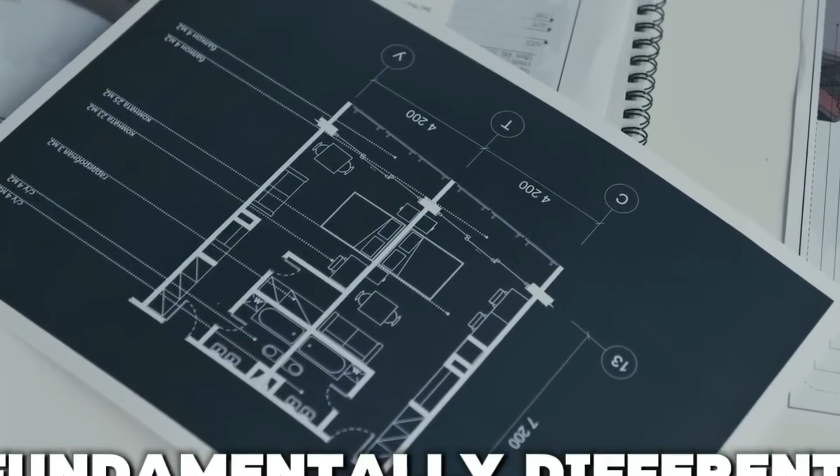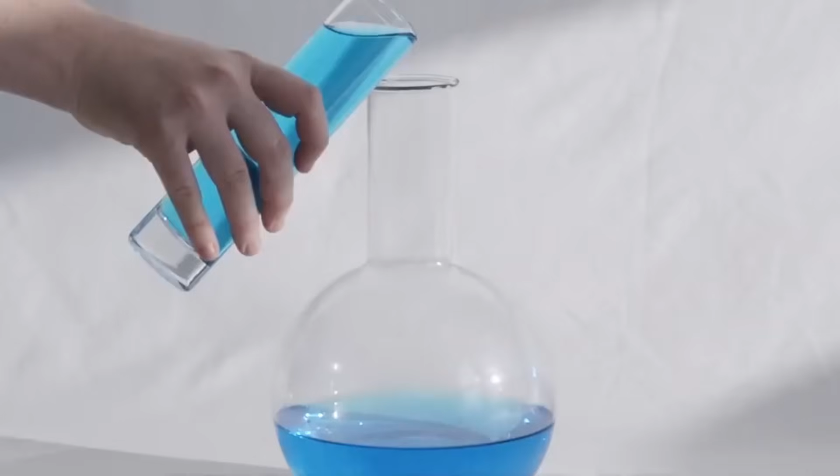It is not oil, it is not lithium, it is not uranium in the traditional sense. It is something so ordinary, so ancient, so completely unremarkable to the human eye that most people walk past it every single day without a second thought. It is sand. But not just any sand. A very specific kind of sand, combined with a very specific kind of nuclear fuel, inside a very specific kind of reactor that China has spent 4 decades and billions of dollars perfecting in secret.

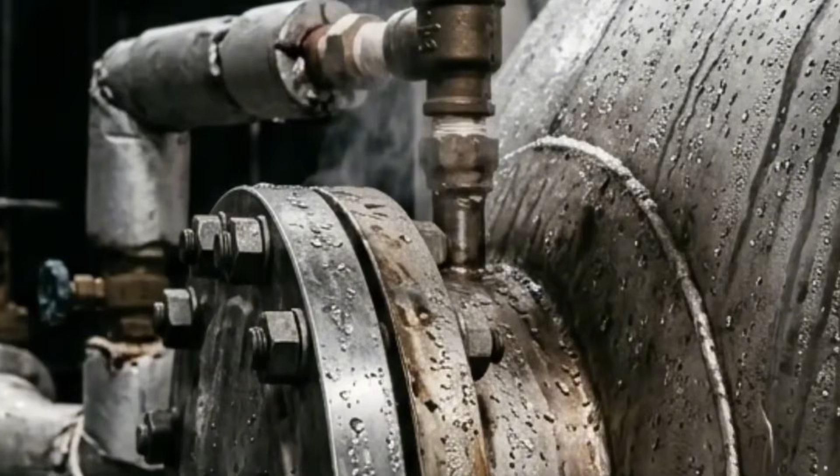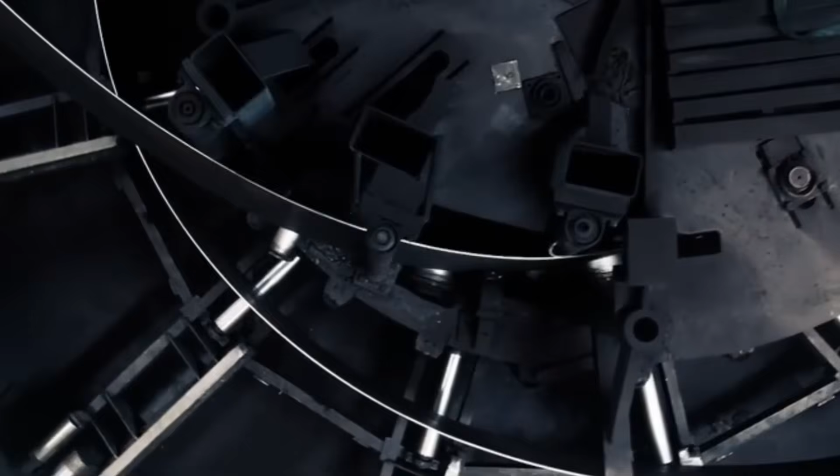And what they have now built in the Gobi Desert may be one of the most consequential engineering achievements of the last 100 years. To understand why that claim is not an exaggeration, you have to understand the scale of what is actually being proposed here. A single commercial-scale version of this reactor, according to the engineering projections published by the Chinese Academy of Sciences, could generate enough electricity to power a city of 1 million people continuously for 1,000 years.

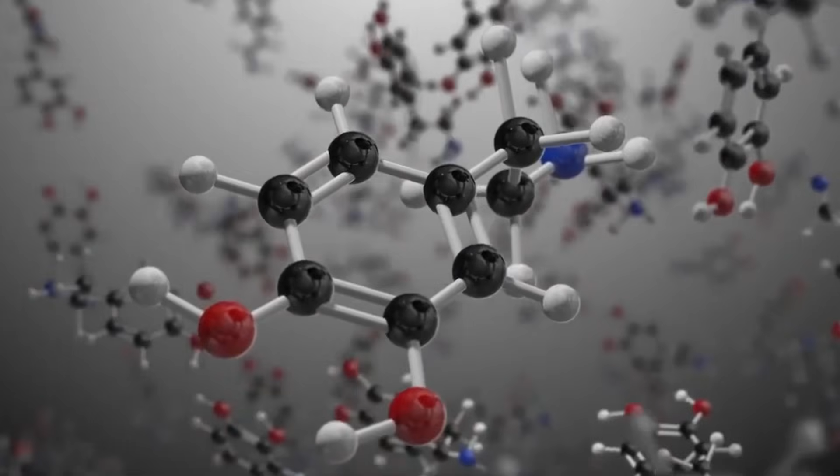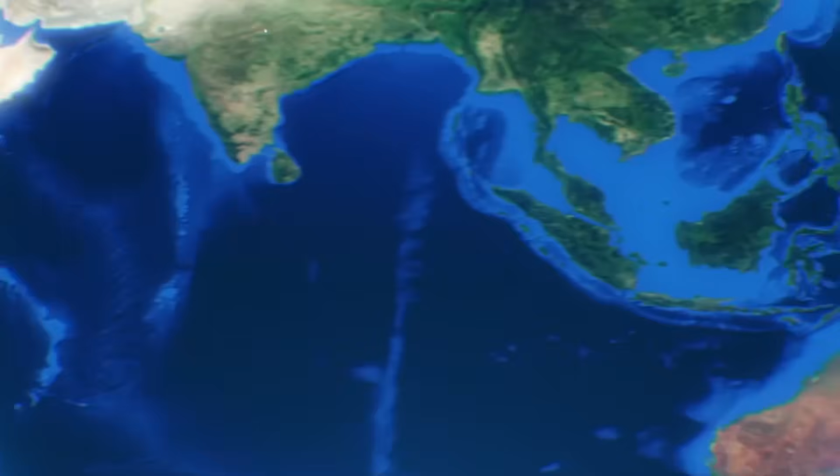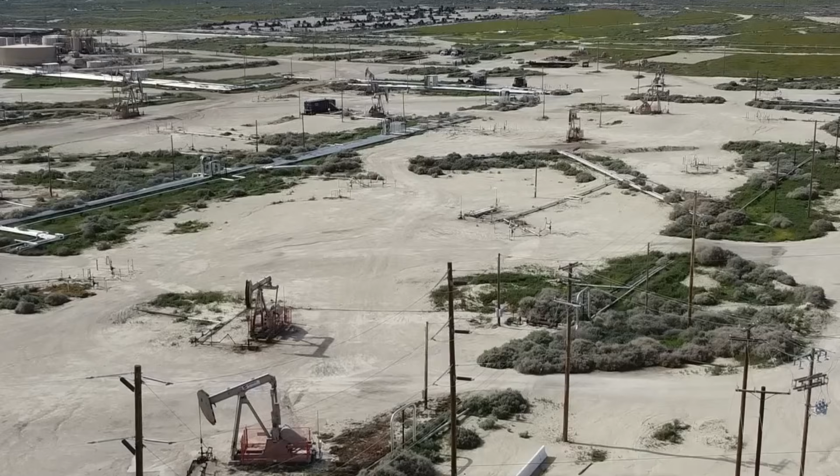Not 100 years, 1,000. With no carbon emissions, with no risk of the kind of catastrophic meltdown that destroyed public trust in nuclear power after Chernobyl and Fukushima, and using a fuel that is so abundant in China's western territories that geologists estimate the country is sitting on reserves sufficient to sustain human civilization at current energy consumption levels for 60,000 years. That number is not a typo.

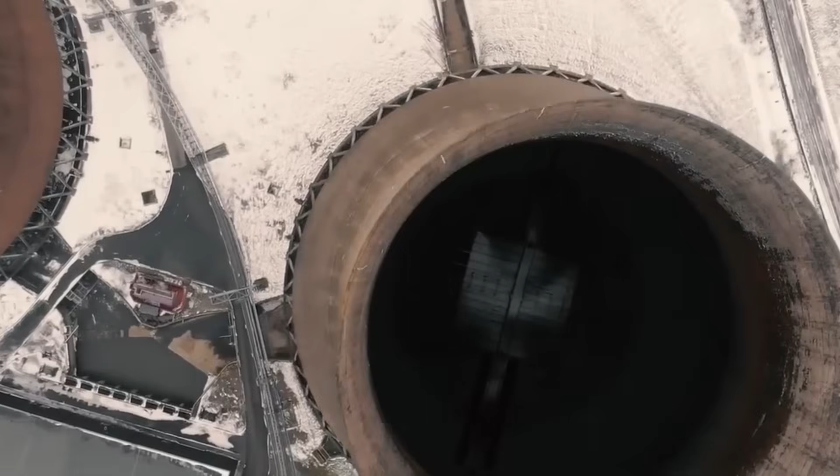The reactor is called the thorium molten salt reactor, and the substance that makes it work, the material that is now being called the fuel of the future, is thorium, a mildly radioactive element that was discovered in 1829, named after the Norse god of thunder, quietly ignored by the global nuclear industry for the better part of a century, and is now the centerpiece of what may be the most ambitious clean energy project in human history.

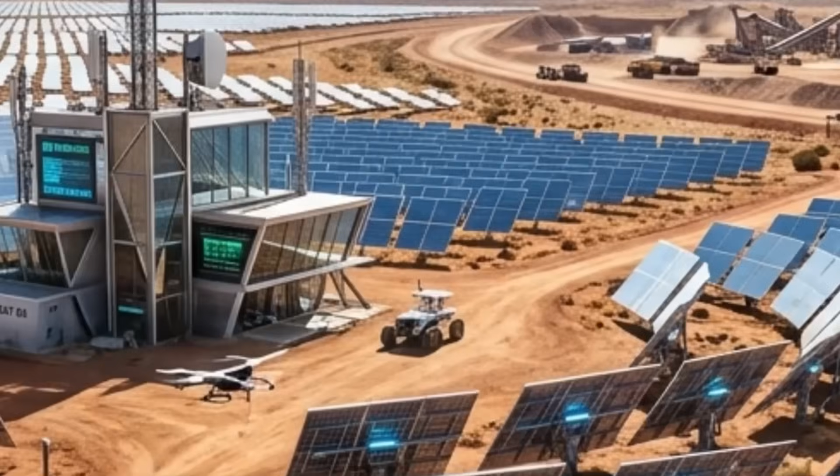Picture a landscape of almost total desolation. The Gobi Desert in the Gansu province of northwestern China, where temperatures swing from -30 degrees in winter to over 40 degrees in summer. Where the wind strips paint from metal and sand fills every seal and gap in equipment that engineers bring in from the outside. It is exactly the kind of place where you would not expect the future of human civilization to be quietly taking shape.

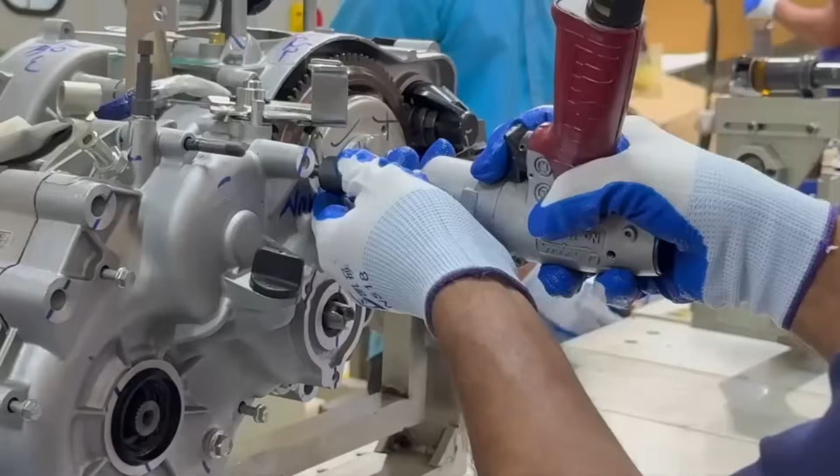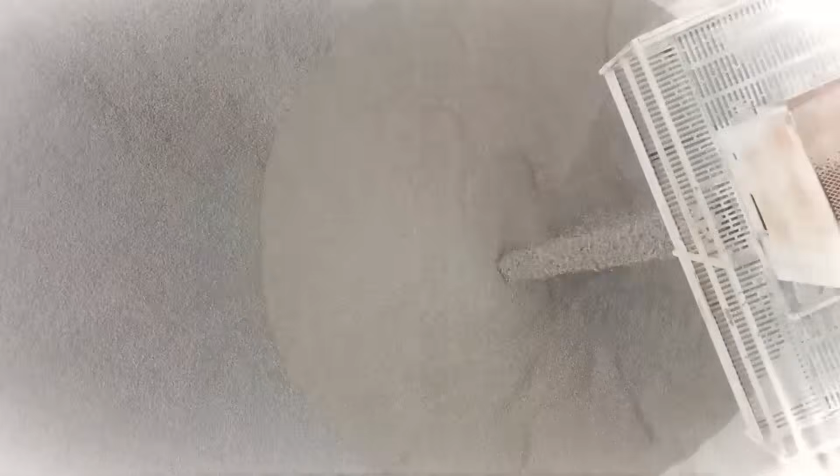But in September 2021, inside a nondescript facility operated by the Shanghai Institute of Applied Physics, a small team of Chinese scientists achieved something that nuclear engineers around the world had been trying and failing to achieve for more than 60 years. They started up the world's first operational thorium molten salt reactor. It ran. It produced heat. It proved the concept. And when the news reached the international scientific community, the response was not celebration. It was shock. Because almost nobody in the West had believed China was that close.

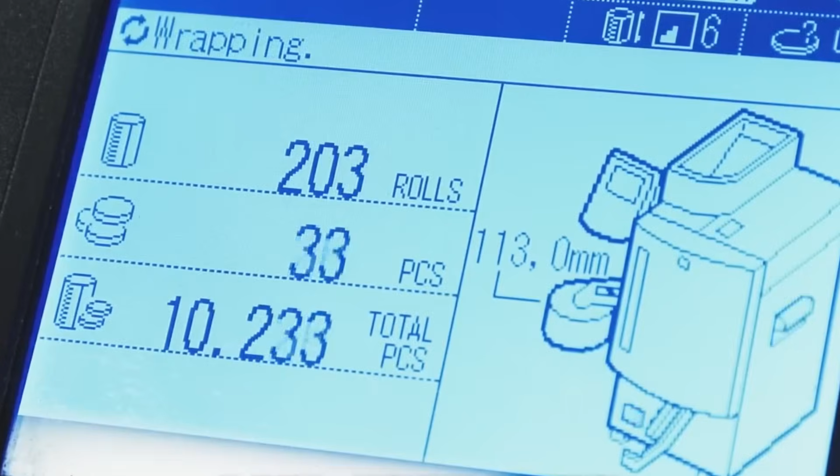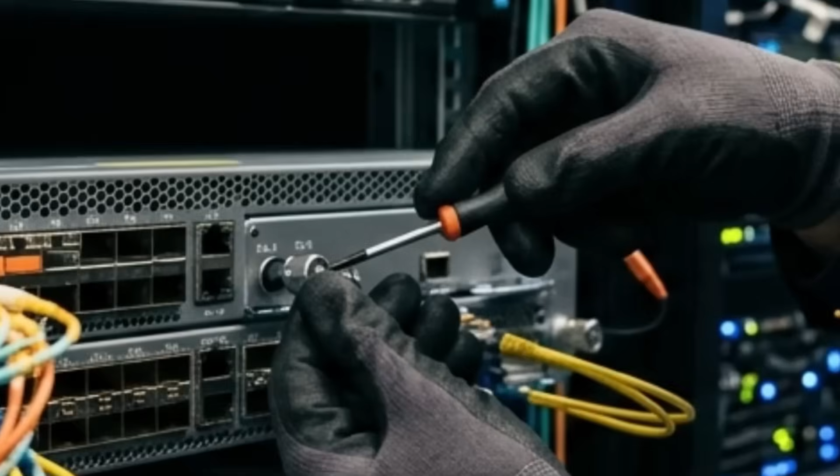The story of why thorium was abandoned in the first place is one of the most consequential decisions ever made in the history of energy policy. And it was not a decision made on scientific grounds. It was a decision made on military grounds. In the 1950s, when the United States was racing to build a nuclear arsenal, the government needed a specific material to manufacture nuclear weapons: plutonium. And plutonium comes from uranium reactors.

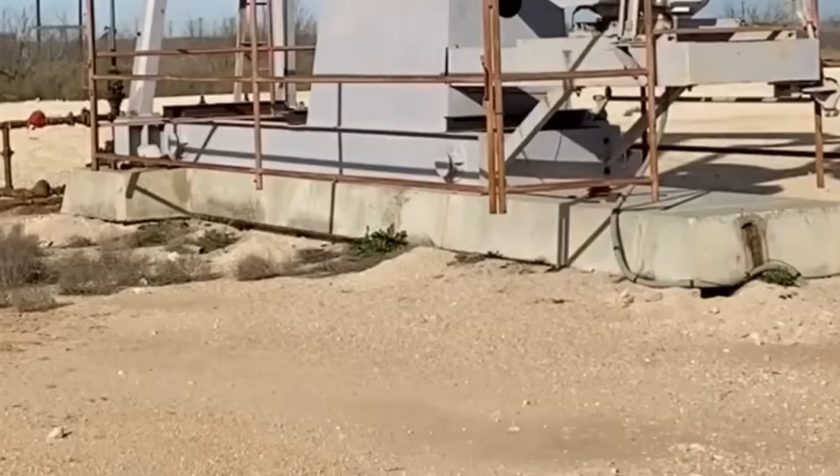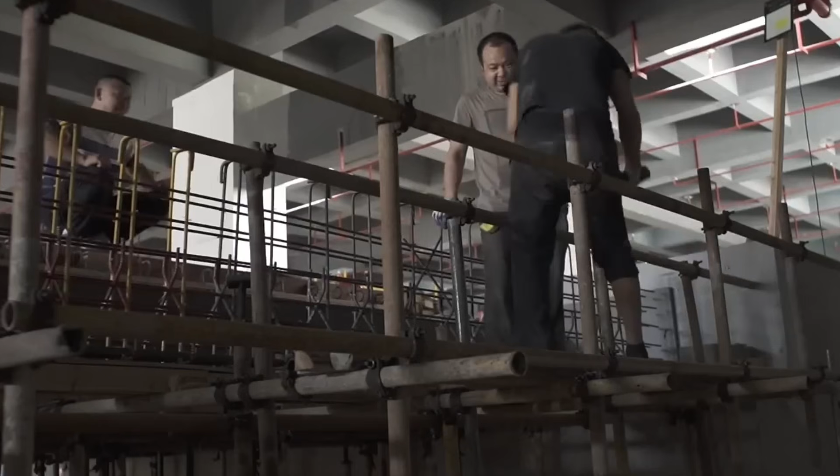Thorium reactors, by contrast, do not naturally produce plutonium in usable quantities. They produce uranium-233, which is theoretically weapons-capable but extraordinarily difficult to weaponize in practice. So when the Atomic Energy Commission sat down in the 1950s and 1960s to decide which reactor technology to back with federal funding and political support, the choice was not made by asking which technology would be safest, or cleanest, or most efficient. The choice was made by asking which technology would be most useful for producing nuclear weapons material. Uranium won. Thorium was sidelined.

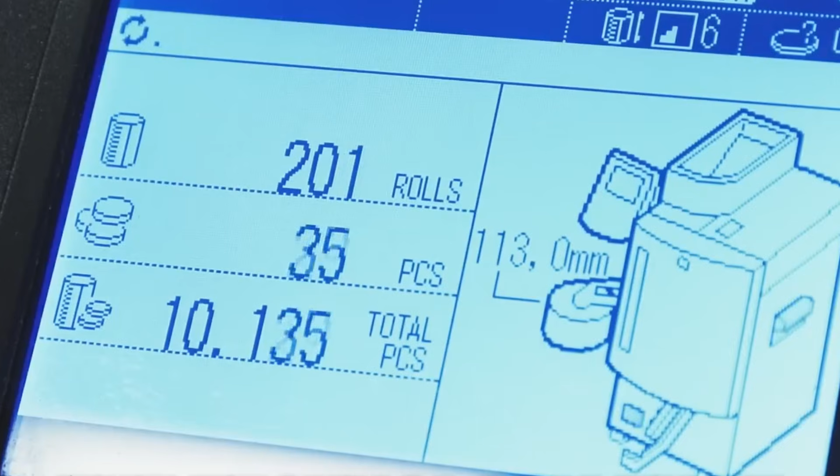And the entire global nuclear industry was built around uranium-fueled light water reactors for reasons that had nothing to do with whether they were the best technology for generating electricity. This is where things become interesting, because the engineers who championed thorium in those early years were not wrong about the physics. They were simply outmaneuvered by the political realities of the Cold War.

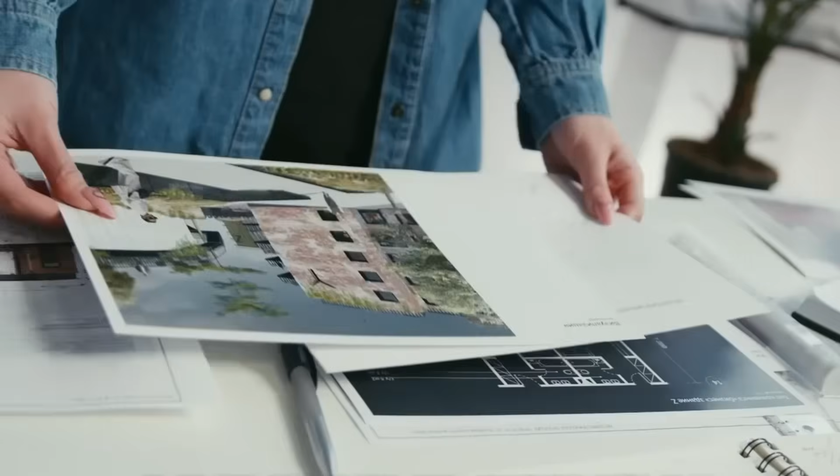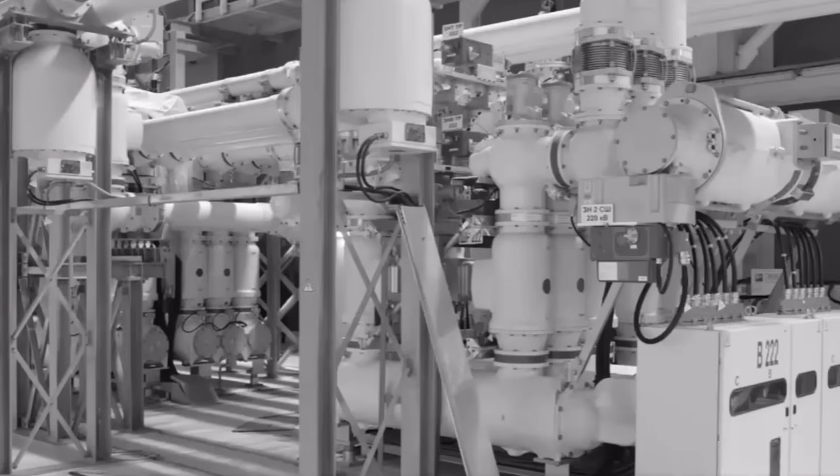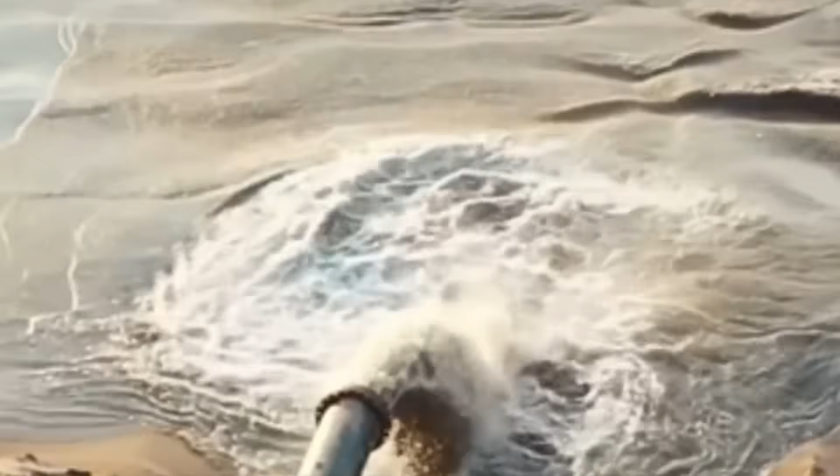And the physics of thorium is genuinely extraordinary. A thorium molten salt reactor operates on a fundamentally different principle than anything most people think of when they hear the word nuclear. There is no solid fuel rod. There is no pressurized water coolant. There is no risk of the kind of steam explosion or hydrogen fire that caused the disasters at Chernobyl and Fukushima. Instead, the thorium and the coolant are dissolved together into a liquid salt mixture, operating at atmospheric pressure inside a sealed system that has an almost miraculous safety property built into the physics itself.

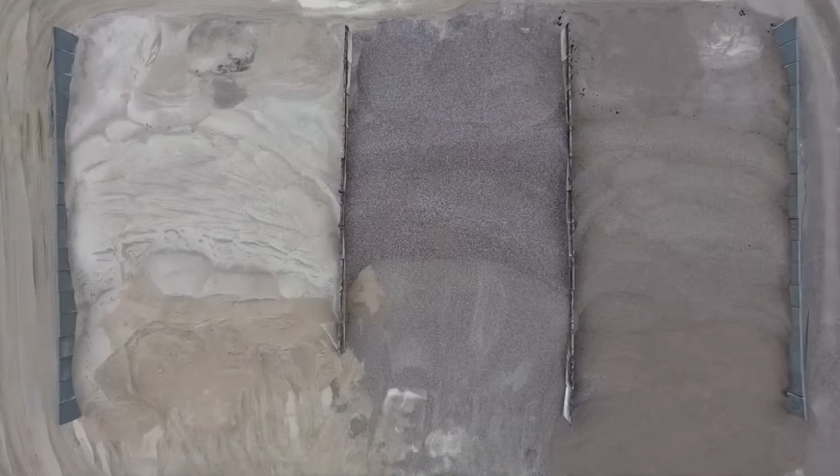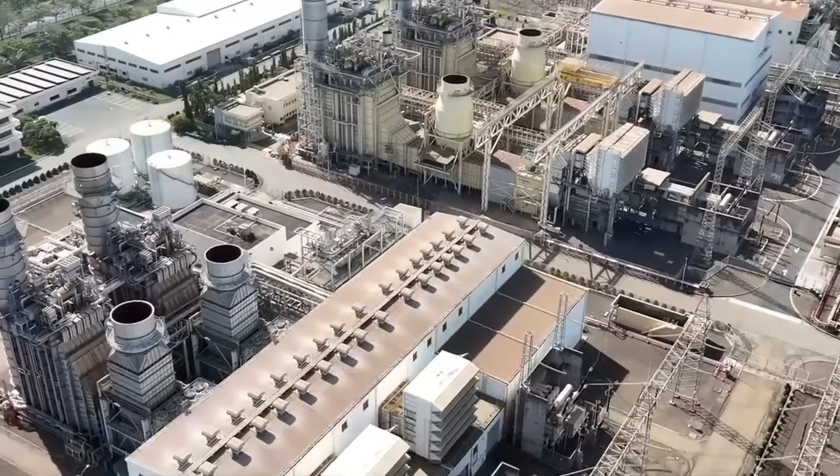If the reactor gets too hot, the liquid salt expands, the nuclear reaction slows down, and the system cools itself. No operator intervention required. No emergency cooling systems. No backup generators that need to keep running. The reactor is, in the language of nuclear engineers, walk-away safe. You can turn off every pump, evacuate every operator, and the reactor will shut itself down without releasing a single radioactive particle into the environment.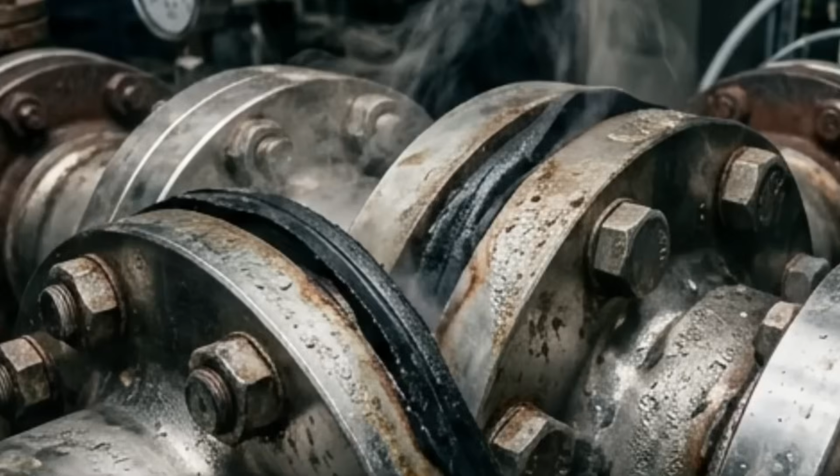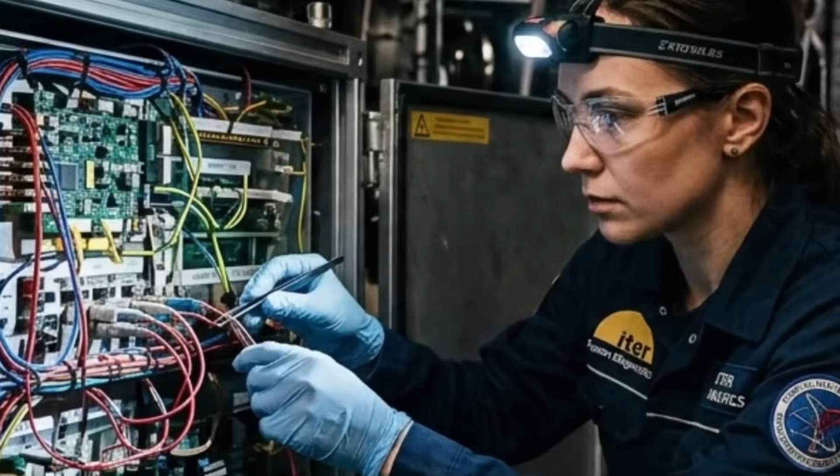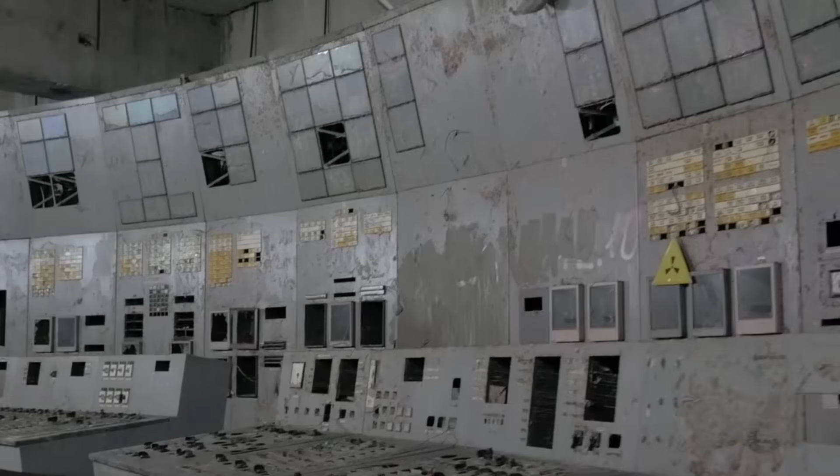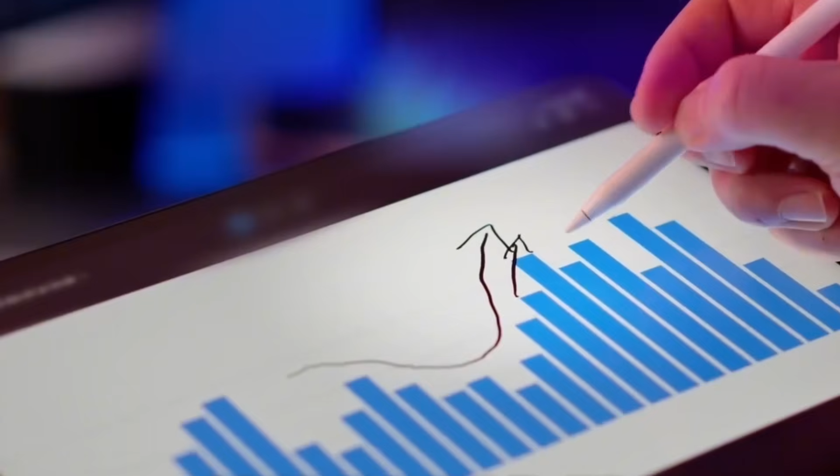But the safety properties are only the beginning. What makes thorium molten salt reactors genuinely different from anything the world has ever built before is the fuel cycle itself. A conventional uranium reactor is astonishingly inefficient. It uses roughly 3 to 5% of the potential energy contained in the uranium fuel before the fuel becomes too degraded to sustain a reaction and has to be removed and stored as high-level radioactive waste. The rest of that energy, 95 to 97% of the potential locked inside the uranium, is simply left behind. Locked inside radioactive material that will remain dangerous for tens of thousands of years.

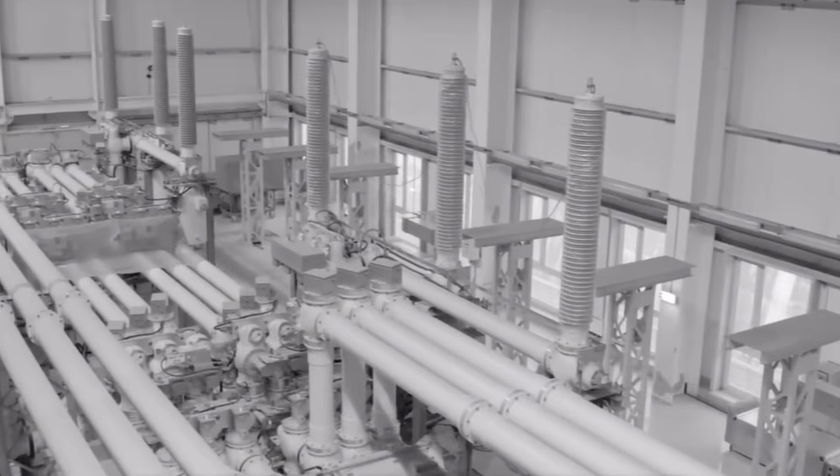A thorium molten salt reactor, by contrast, can consume virtually all of the available energy in its fuel. Estimates from the International Atomic Energy Agency suggest that thorium reactors could be 60 to 90 times more fuel efficient than conventional uranium reactors. That is not a marginal improvement. That is a fundamental transformation of what nuclear energy is capable of delivering.

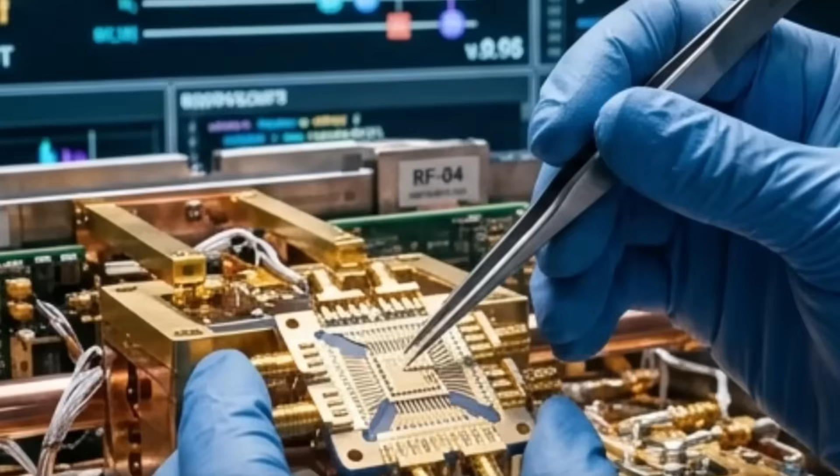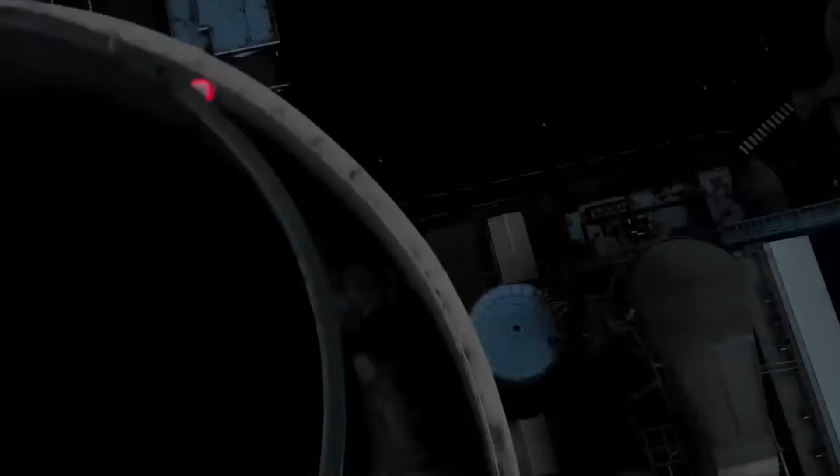And then there is the waste question. This is the issue that has haunted nuclear power since the beginning. Where do you put the radioactive material when you are done? Conventional nuclear waste remains dangerous for between 10,000 and 100,000 years, depending on the isotope composition. Entire countries have spent decades and billions of dollars trying to build geological repositories deep underground, where they can isolate the waste from the biosphere for time periods longer than human civilization has existed.

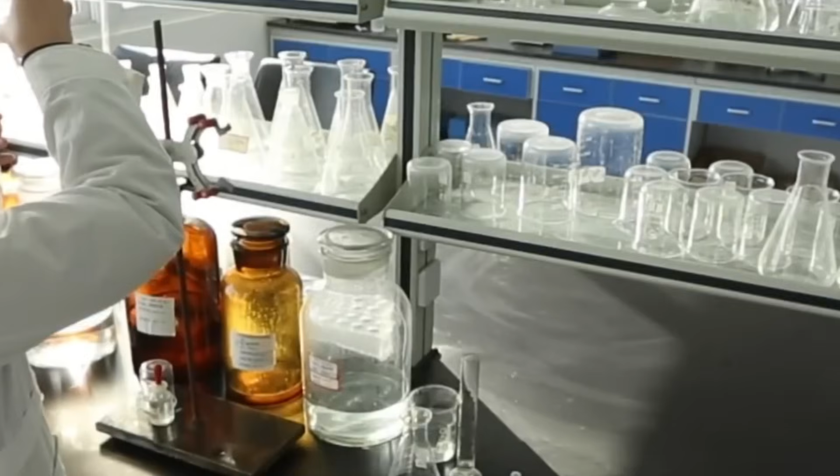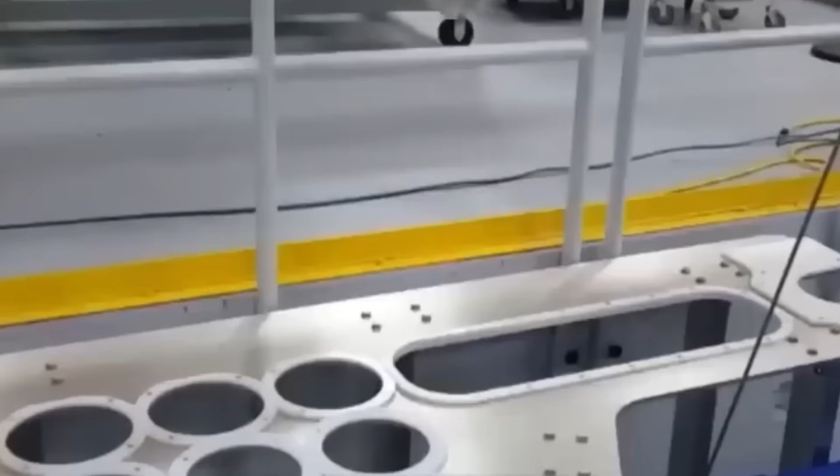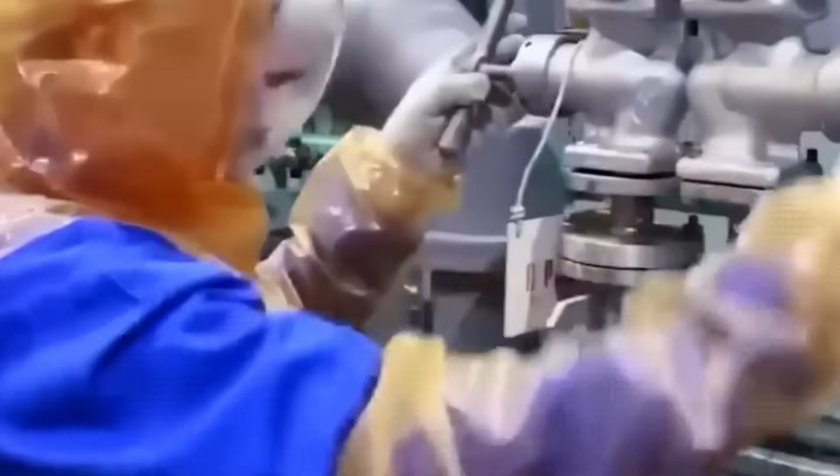Finland is building one. Sweden has one in progress. The United States spent 30 years and over $15 billion trying to build one at Yucca Mountain in Nevada before the project was canceled for political reasons. The waste problem is not solved. It is deferred. Thorium molten salt reactors produce waste that remains dangerous for roughly 300 years. Not 10,000 years. Not 100,000 years. 300 years. Which is a time frame that human institutions can actually plan for, fund, and manage.

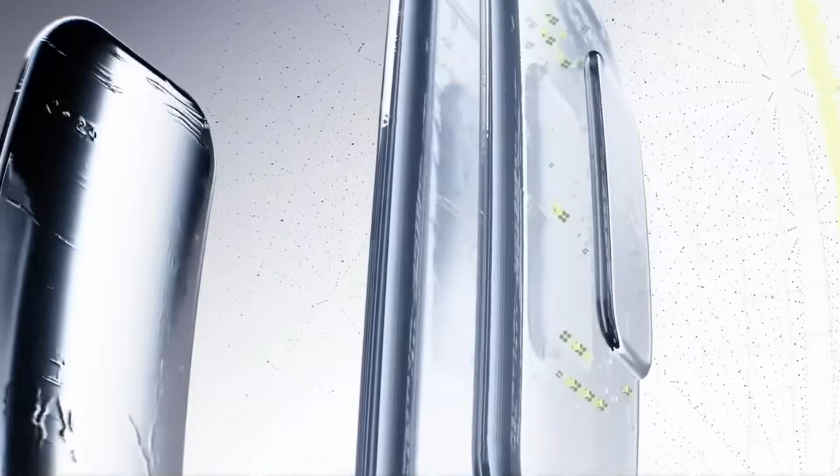For decades after thorium was sidelined in the 1950s and 60s, the concept existed mostly in academic papers and the arguments of a small group of nuclear engineers who believed the world had taken the wrong fork in the road. The most famous of these was Alvin Weinberg, the director of Oak Ridge National Laboratory in Tennessee, who ran a working molten salt reactor at Oak Ridge from 1965 to 1969. The reactor worked. It demonstrated the physics. It produced continuous power for more than 13,000 hours of operation.

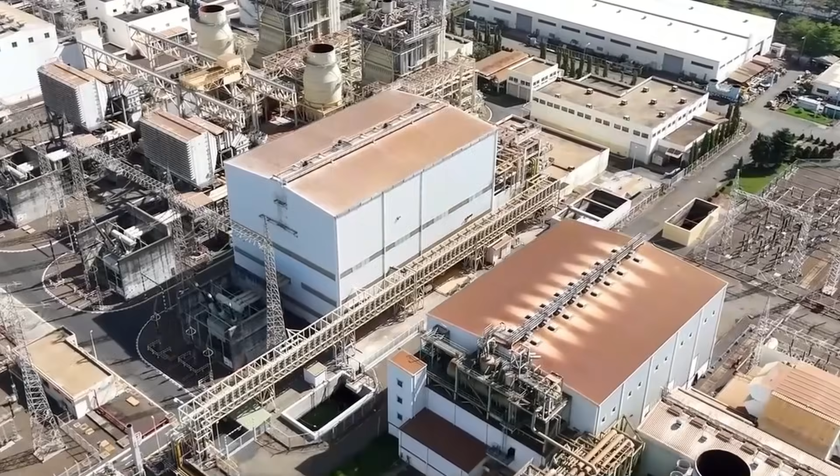And then the Atomic Energy Commission shut it down, defunded further research, and Weinberg himself was eventually fired, in part because he would not stop arguing that molten salt reactors were the safer and more rational choice for civilian nuclear power. The decision to shut down the Oak Ridge program is one of those moments in technological history where you can trace a clear line between a policy choice and a consequence that rippled forward for decades. What changed was China.

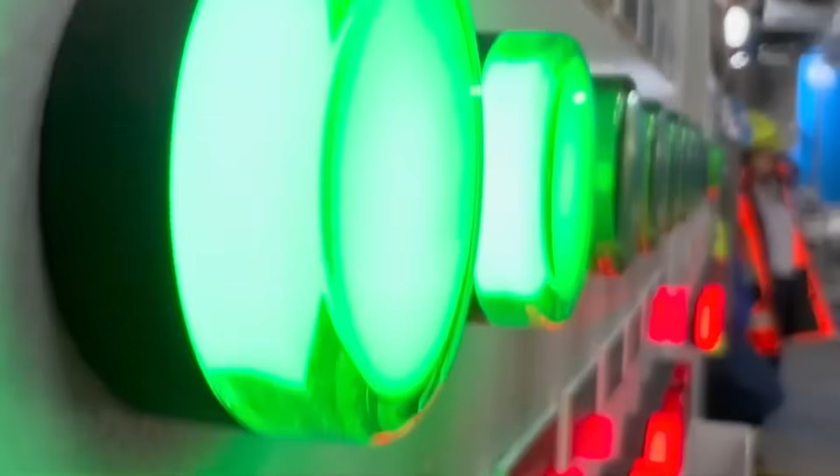In 2011, the same year that the Fukushima disaster in Japan triggered a global wave of reactor shutdowns and public fear about nuclear power, the Chinese Academy of Sciences made a decision that went almost completely unnoticed in the Western press. They launched a formal national research program to develop thorium molten salt reactor technology, with a budget that would eventually exceed $3 billion, involving more than 700 scientists and engineers across multiple institutions. The timing was not coincidental.

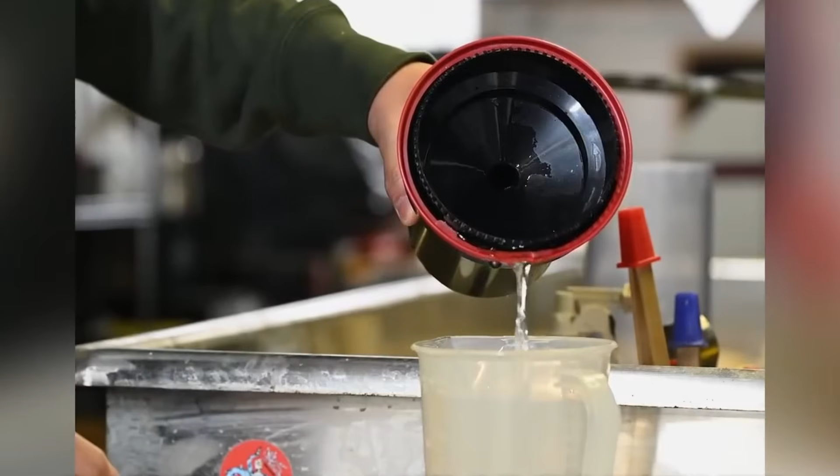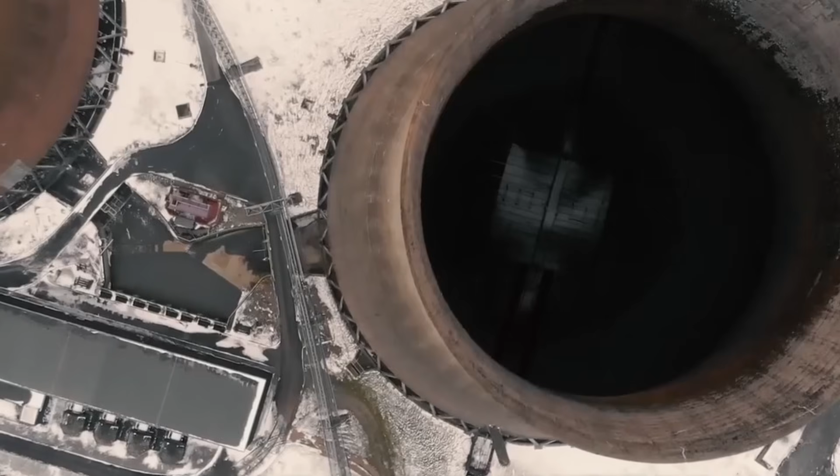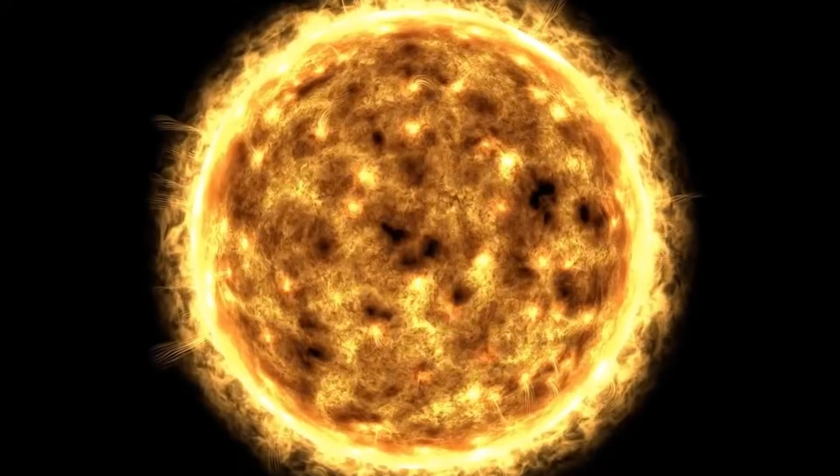Chinese energy planners looked at the Fukushima disaster and drew the opposite conclusion from most of the world. Instead of retreating from nuclear power, they concluded that the problem was not nuclear power itself. The problem was the specific reactor design that had been inherited from Cold War military priorities. They looked at molten salt reactors, looked at the physics, looked at the safety profile, and decided this was worth a serious national effort.

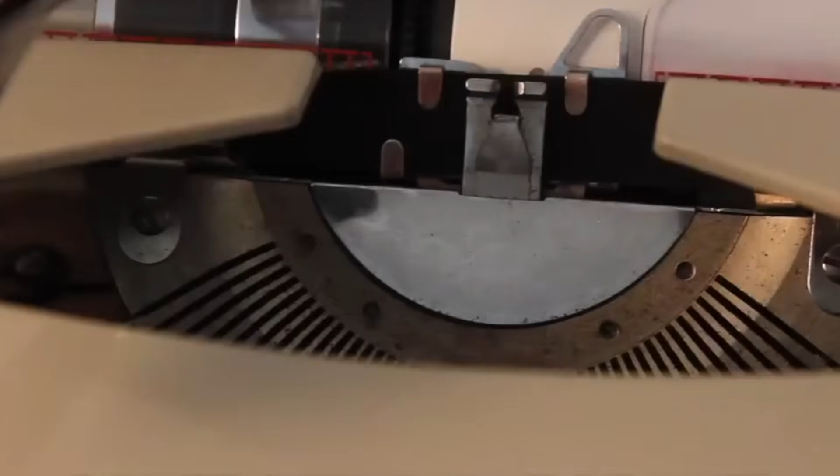The scale of what China built over the following decade is difficult to fully appreciate without seeing the facility plans. The Shanghai Institute of Applied Physics, which led the program, expanded from a few dozen researchers to an institution employing over 500 full-time scientists and engineers. Construction began on a dedicated research campus in Shanghai and a test facility in the Gobi Desert. Patent filings related to thorium molten salt technology from Chinese institutions went from essentially zero in 2010 to over 700 by 2021, more than any other country in the world by an enormous margin.

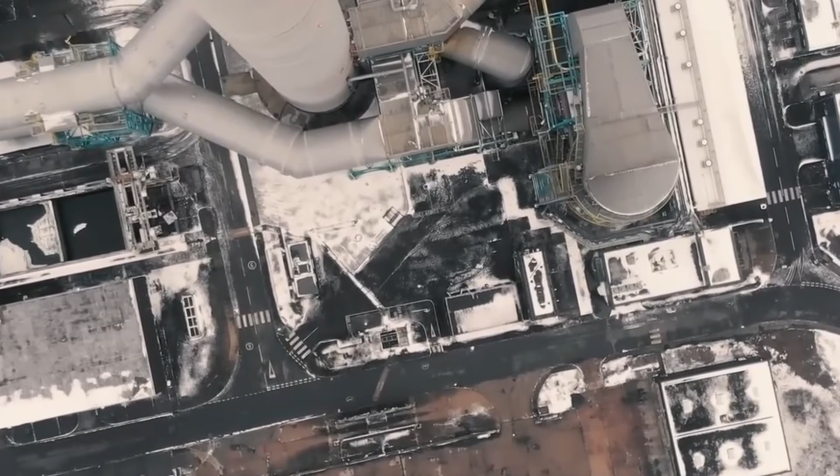While the United States, Europe, and most of the rest of the nuclear world continued pouring resources into the existing uranium-based infrastructure, China was quietly building the foundations of a completely different kind of nuclear industry. The September 2021 startup of the test reactor in Gansu province was the proof of concept that everything had been building toward. The reactor is small, a 2-megawatt thermal unit designed not to generate power, but to demonstrate that the technology works at operational scale in a real-world environment outside a laboratory. It is the Wright brothers moment. It is not the transatlantic jet.

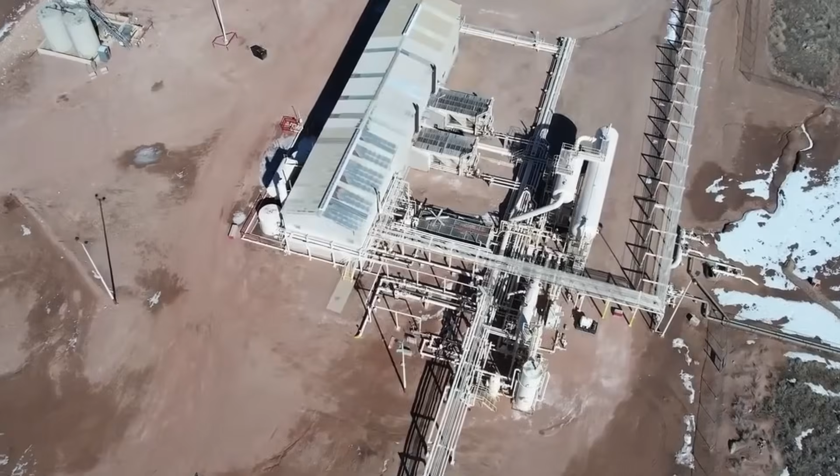But what it proved was the thing that decades of engineering work had been aimed at proving, that a thorium molten salt reactor can be built, started up, operated, and controlled in the real world, not just on paper and not just in simulation. Think about it this way. The gap between a 2-megawatt thermal demonstration unit and a commercial power plant is vast. But it is a gap that the nuclear industry knows how to cross. Every reactor technology that exists today began as a test unit that generated a tiny fraction of the power of the commercial plants that followed.

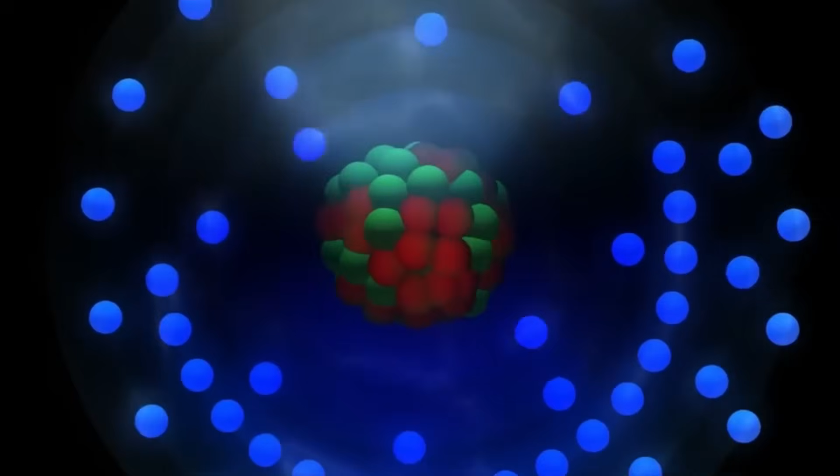The PWR, the pressurized water reactor that powers most of the world's nuclear fleet, started as a prototype submarine reactor. The boiling water reactor began as a small experimental unit at the Argonne National Laboratory in the 1950s. The path from demonstration to deployment is long and expensive and filled with engineering challenges, but it is a path with a known shape. China has now announced the construction of a 373-megawatt commercial demonstration reactor, also in Gansu province, with a target operational date in the 2030s.

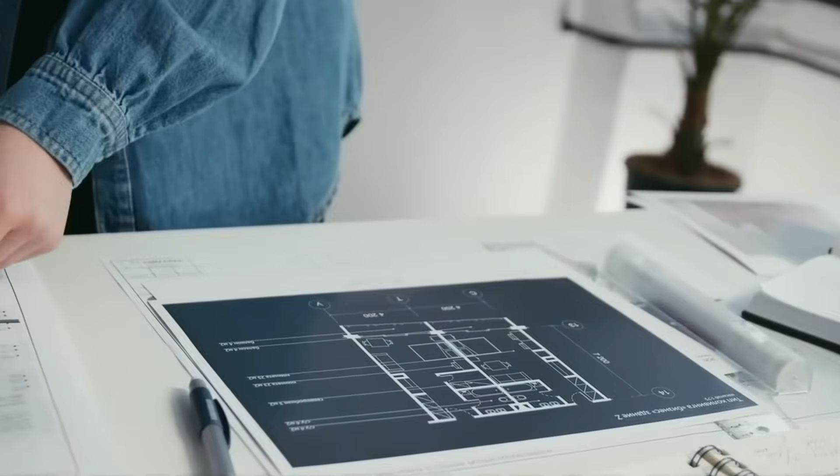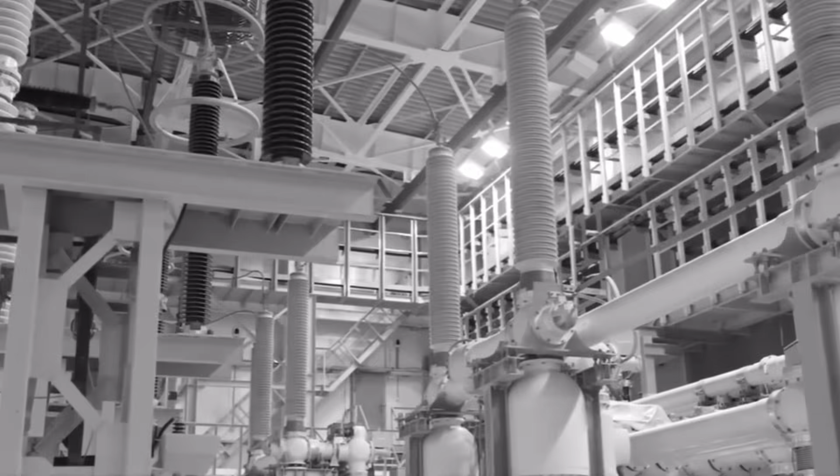This is not a research unit. A 373-megawatt reactor is a serious piece of energy infrastructure, comparable in output to a medium-sized coal or gas power plant. If it works at commercial scale, and the Chinese government is betting billions that it will, the next step is a fleet of standardized units that can be manufactured, shipped in modular sections, and installed in remote locations, in deserts, in regions far from major water sources, in developing countries that have never had access to reliable baseload power, using fuel that can be extracted from monazite sands, which happen to be extraordinarily abundant throughout China's western territories.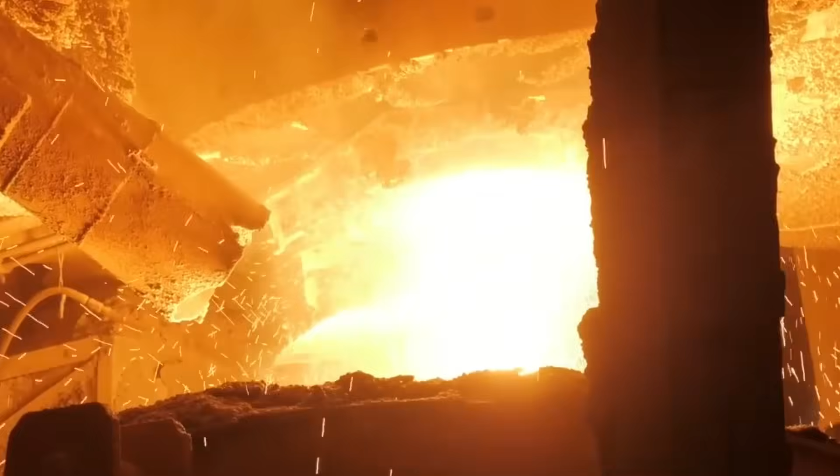Here is the part that most people do not fully appreciate when they first encounter these numbers. China is estimated to hold roughly 220,000 tons of thorium reserves, which according to the World Nuclear Association makes it the holder of the second or third largest thorium deposits on Earth. But the global reserve picture is even more striking. India holds the largest known deposits, estimated at nearly 1 million tons. Brazil has significant reserves. Australia has substantial quantities.

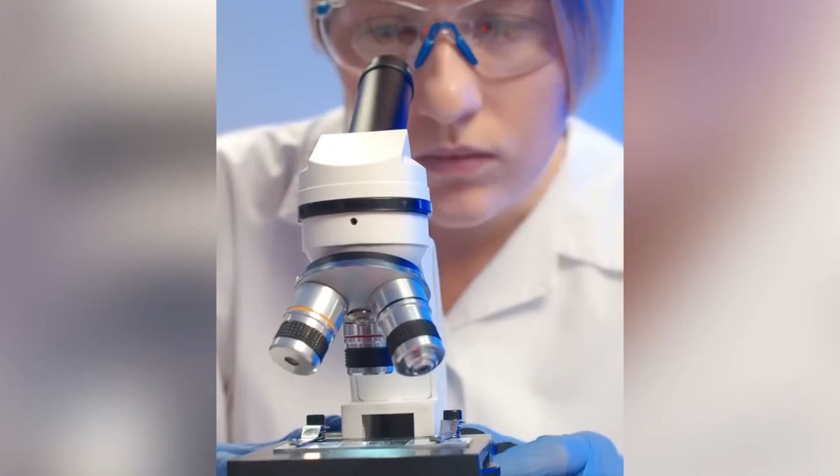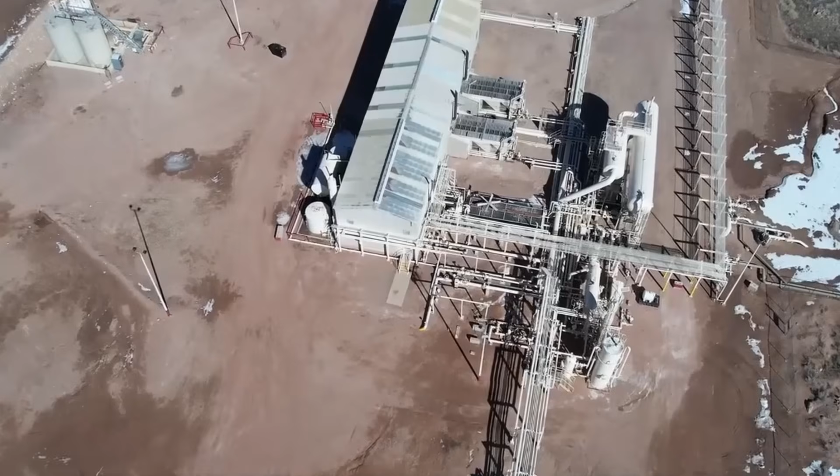Even the United States has thorium deposits large enough to be geologically meaningful. Thorium is, by any reasonable geological measure, not a scarce resource. It is a common one. It is found in soil and rock and beach sand across enormous portions of the Earth's surface. It has never been mined at scale because there has never been a commercial reason to mine it. The reactors that could use it did not exist. Now they are being built.

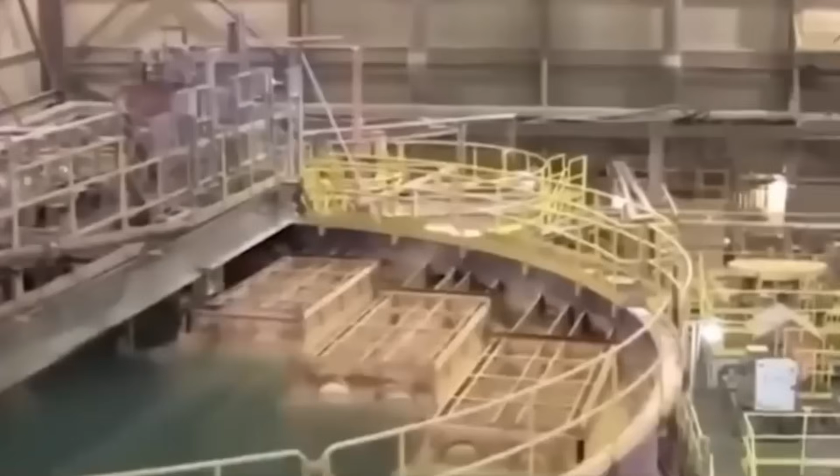Let that sink in. The global thorium resource base, if fully utilized in molten salt reactors operating at the fuel efficiencies that the physics predicts, is estimated to contain enough energy to power human civilization at its current total consumption level for somewhere between 20,000 and 100,000 years.

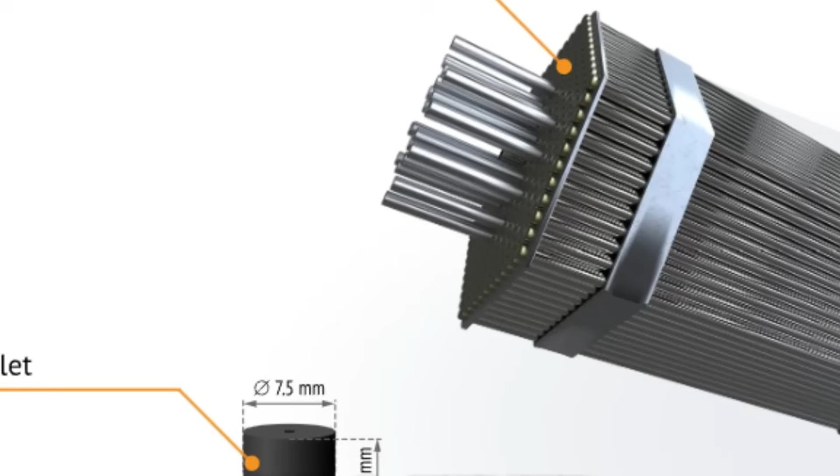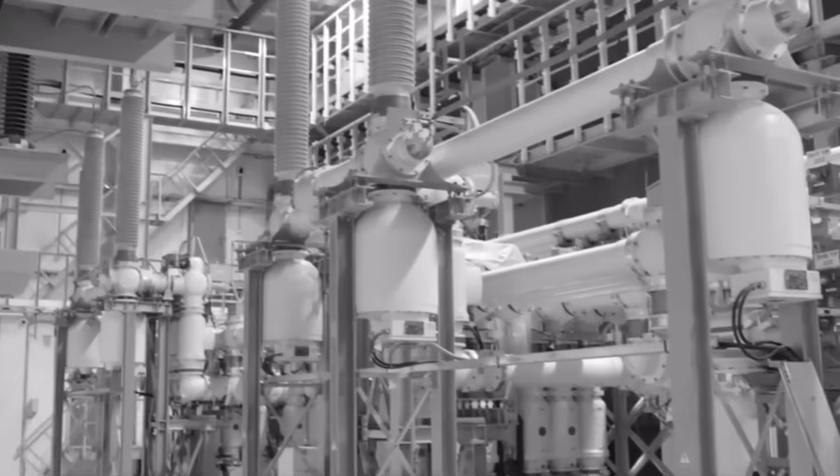Those numbers come from analyses published by the Oak Ridge National Laboratory, the institution that ran the original molten salt reactor program in the 1960s before it was shut down. They are not propaganda figures from a government trying to sell a technology. They are engineering assessments from the institution that knows more about this specific reactor design than almost anyone else on Earth. The implications extend well beyond electricity generation.

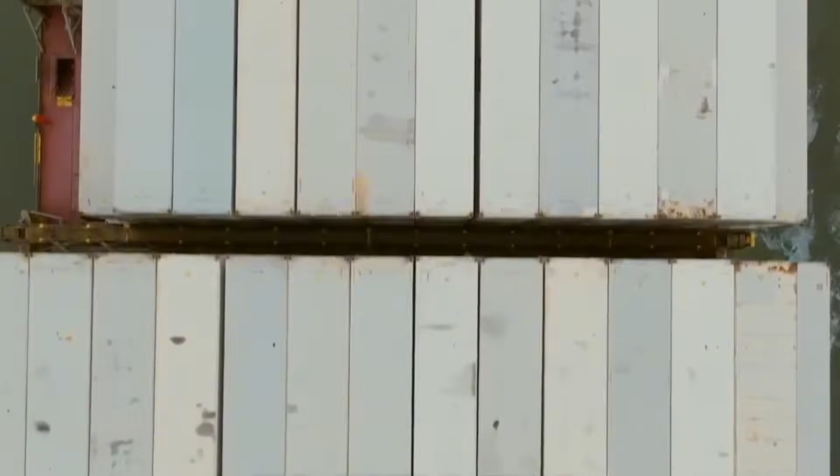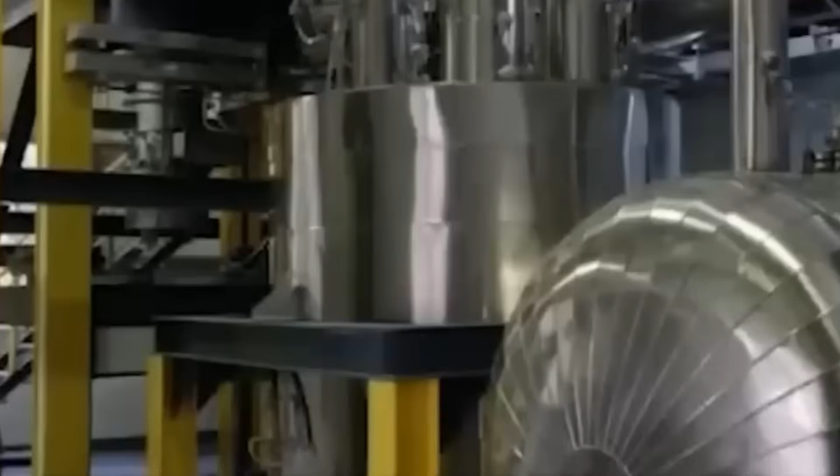One of the persistent challenges of modern energy systems is that electricity grids need power that can be turned up and down to match the fluctuating demand of millions of users. Solar panels generate power when the sun shines. Wind turbines generate power when the wind blows. Neither can be switched on during a cold, still night when a city of 10 million people turns up its heating. Nuclear power has traditionally been what grid operators call baseload power, meaning it runs at full output continuously and fills in the gaps that variable renewables cannot fill.

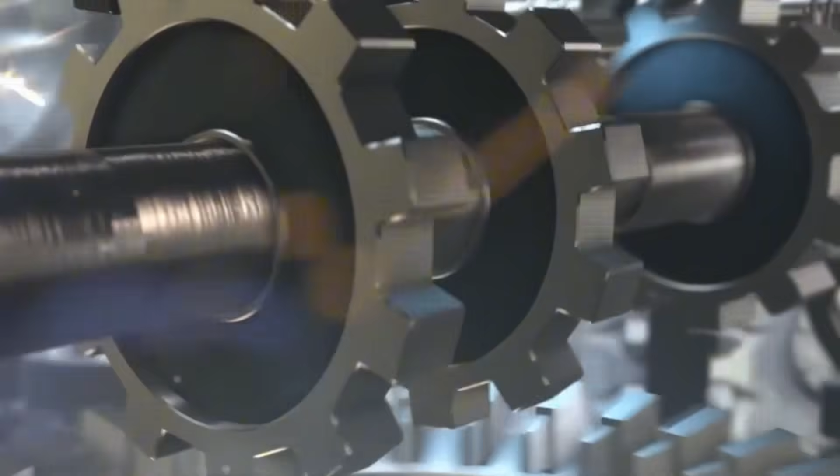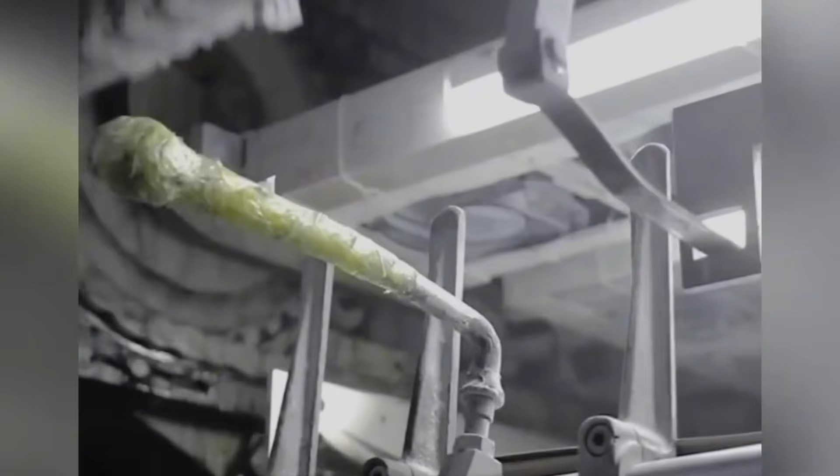A molten salt reactor has an additional advantage here that conventional reactors do not share. The liquid fuel can, in principle, be heated by excess renewable electricity during periods of oversupply, and the stored thermal energy can then be used to generate electricity during periods of undersupply. It is, in effect, a giant thermal battery that happens to also be a nuclear reactor. The combination of properties, load-following capability, walk-away safety, minimal waste, abundant fuel, and high thermal efficiency represents something the electricity system has never had access to before.

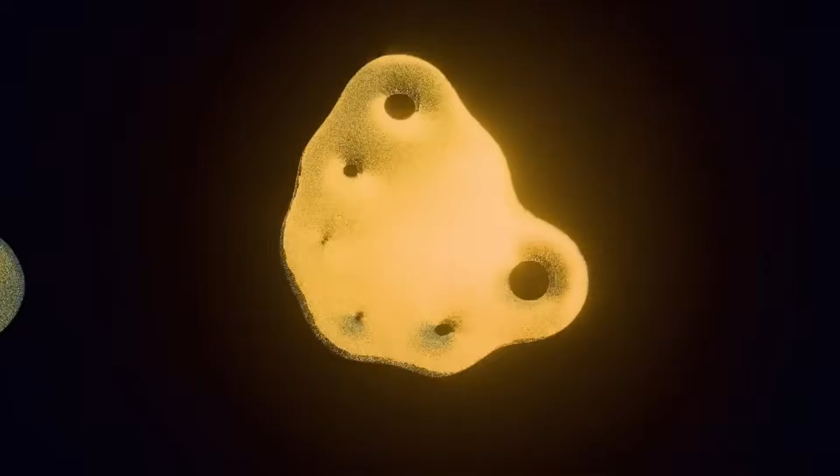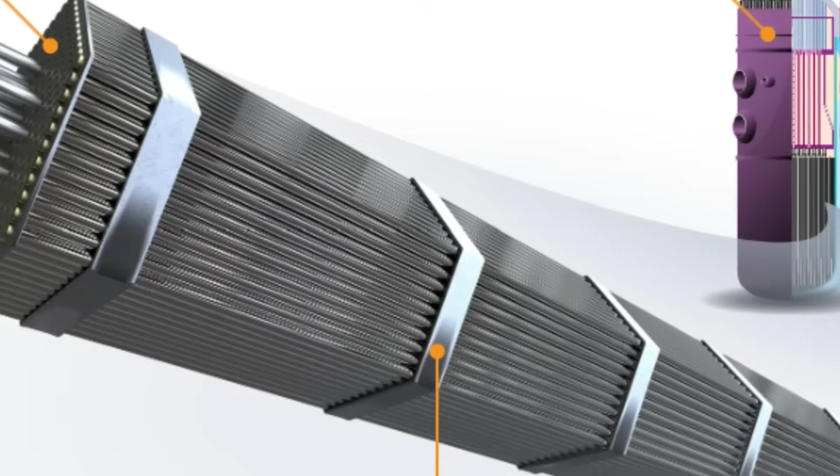The geopolitical dimensions of this technology are significant and worth understanding clearly. The existing global nuclear industry is built around a supply chain for uranium fuel that runs through a small number of countries, involves complex enrichment processes, and is subject to international safeguards and treaty regimes that were designed specifically to prevent the spread of nuclear weapons material. Thorium reactors operate with a different fuel cycle that, while not completely weapons irrelevant, does not produce plutonium as a byproduct and requires a significantly different set of concerns from a non-proliferation standpoint.

Countries that currently cannot access nuclear power because of the political complexities of the uranium fuel cycle might find thorium molten salt technology more accessible. This could mean clean, reliable baseload power becoming available in parts of South Asia, Africa, and Southeast Asia that currently depend almost entirely on coal and gas for electricity generation.

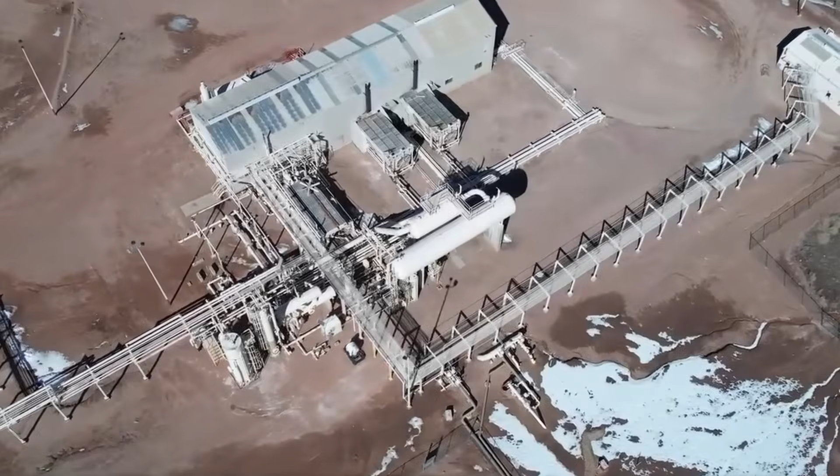The engineering obstacles that remain are real and should not be minimized. Molten fluoride salts, which are the coolant and fuel carrier in the reactor design China is developing, are extraordinarily corrosive materials. They will attack almost any metal they come into contact with at the temperatures required for reactor operation. Finding materials that can survive decades of continuous exposure to hot fluoride salt while remaining structurally sound is one of the central materials science challenges of the entire program. Chinese researchers have been working on specialized alloys and ceramic coatings for years, and they have made substantial progress. But commercial demonstration at scale will reveal challenges that laboratory conditions do not.

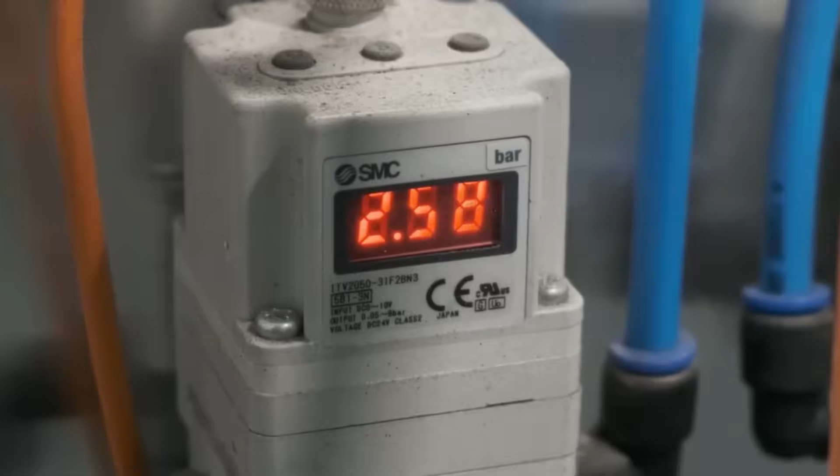The handling and reprocessing of the liquid fuel, which must have some of its components removed and replaced as the reactor operates, is another area where the engineering is complicated in ways that a paper design does not fully capture. And the regulatory frameworks for licensing a commercial thorium molten salt reactor do not exist in most countries because no one has needed them before. What changed in recent years is that the